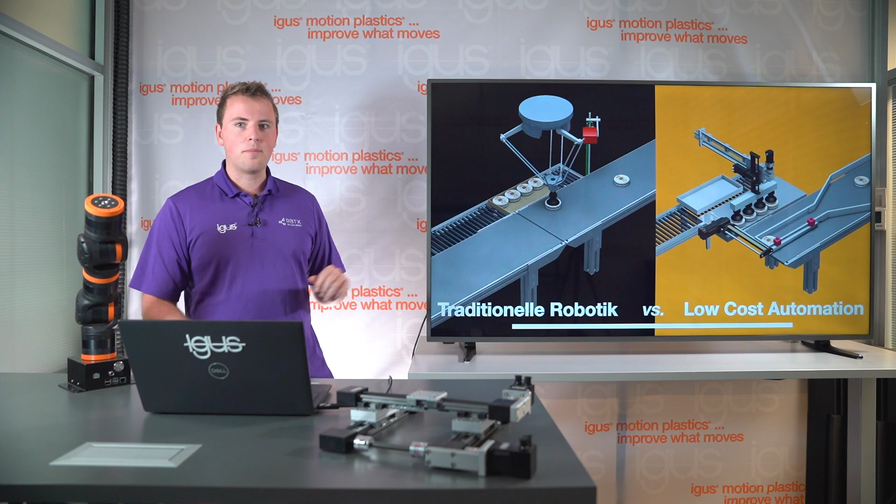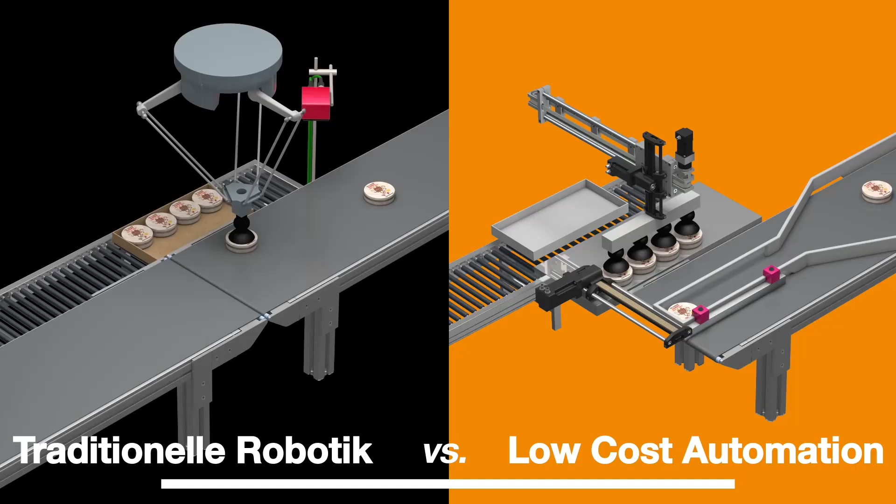So I want to start this webinar off by showing you a case study that we did a couple of years ago. Basically what we do is we compare traditional automation with low-cost automation. So I'll go ahead and play this video so that you can see basically the application here is a conveyor picking application. Something very standard that many automated factories have to deal with. On the left side, you can see a Delta robot with a camera system that is picking parts from the conveyor belt. And I'll run the video.

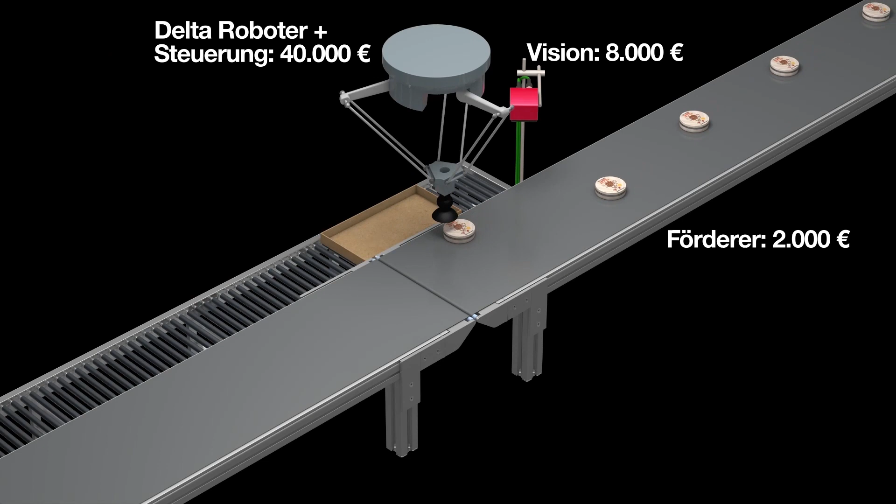Here you can see there's many parts per minute, so the picking has to be done quite fast. And then it's quite the complex process because the parts are distributed all over the conveyor. Now, the problem is not only the cost of the individual components, as you can see here, but there is an extra cost. It's the integration cost, making sure that the vision system works with the Delta robot.

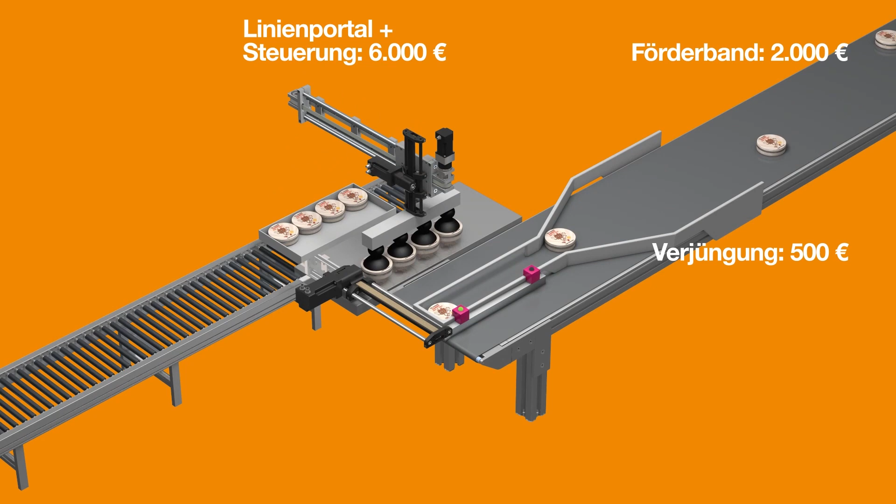In comparison, we have our low-cost option here that basically you can see there's a mechanical alignment system that makes sure that you don't need a camera system, but basically the objects are always in the same spot. You then have a linear pusher and another linear gripper that then take always 4 parts at a time. So as you can see, the cost around 10,000 euros is about a tenth of the price of the traditional robotic system.

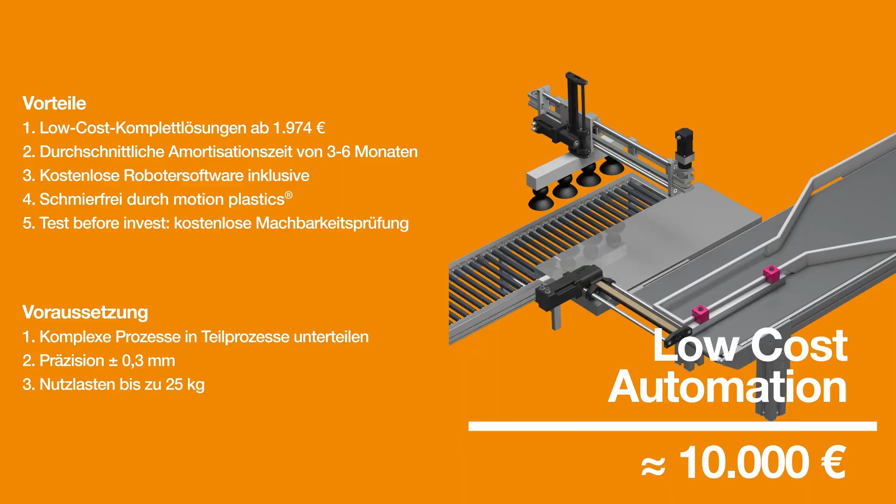One of the main things that you can see here is instead of using one robot, we actually use 2 robots. That's kind of counterintuitive because you might think that's more expensive. But in this case, we're able to lower the cost by using just very simple robots. So we'll talk a little bit more about it later. But one of the core principles of low-cost automation is breaking the process down into multiple steps, almost in as many steps as you can.

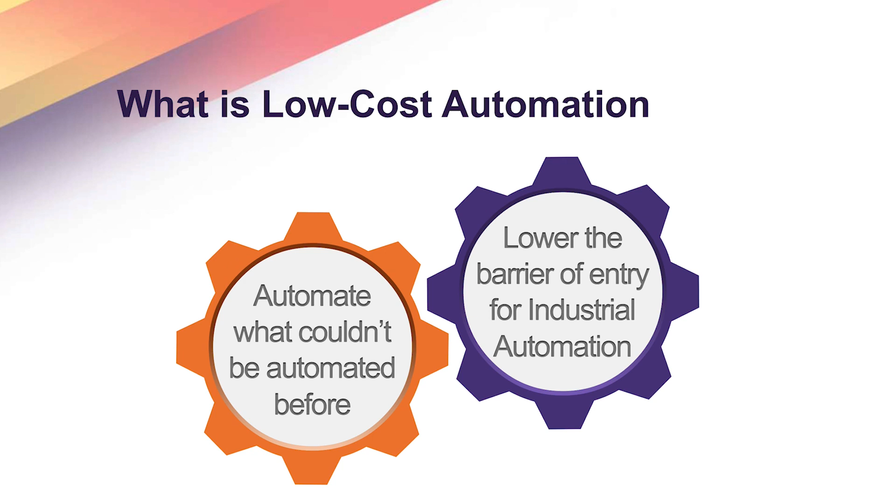But to summarize this, basically what low-cost automation is, is to automate what couldn't have been automated before and to lower the barrier of entry into industrial automation. That means that some processes in your factory just don't have the ROI, that you can just go out and get an RFQ from integrators so that you get an ROI on that project really fast, or never. You never know.

So basically what we found is that automation projects have two cost pillars. One side is the hardware side. Fast robots with heavy payloads and a lot of good precision, they cost a lot of money. Camera systems are very expensive, and then the grippers and the whole system together. That's one pillar, expensive hardware.

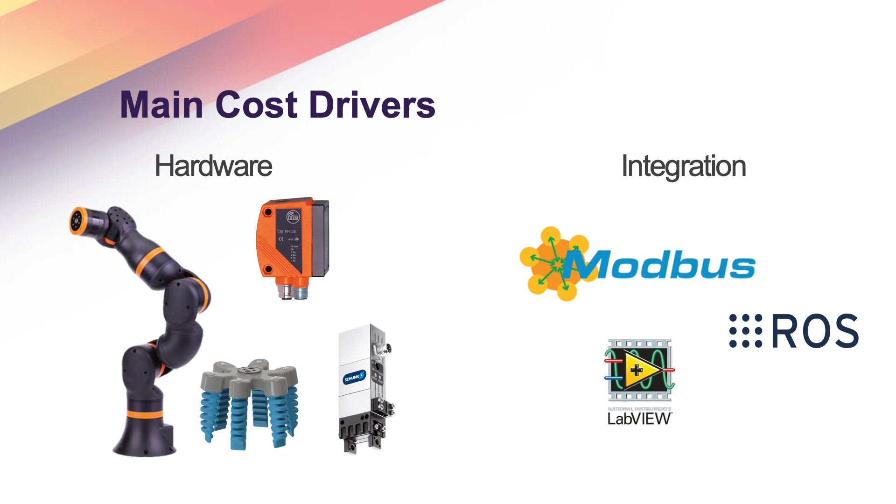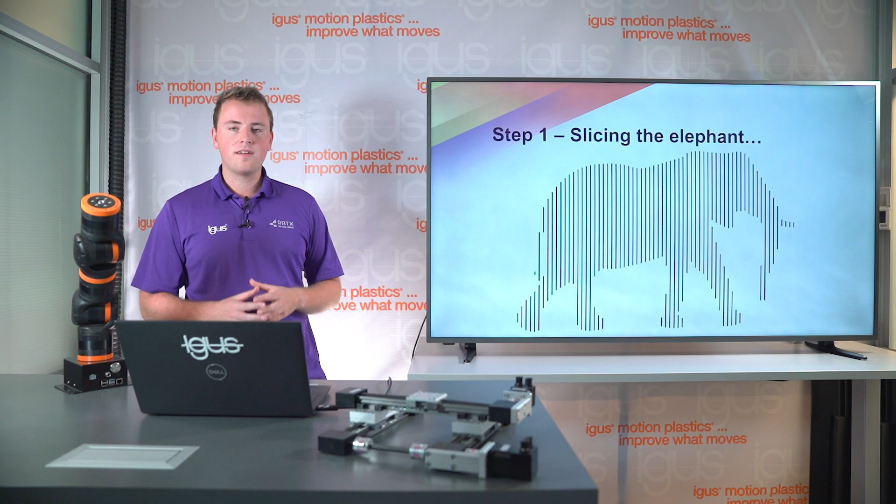The other pillar is the integration side. So using difficult-to-use software that needs a lot of expertise to plug the whole system together. That is usually outsourced because it's expensive to have a team like that in the beginning, but not having that means that it's even more expensive for those projects because you have to outsource it to someone else to do it for you. And then every single time something goes wrong or you have to change something, you have to pay those people again.

So the first step, as I said, for low-cost automation is to take a process and break it down into individual steps. As we just saw, there was a conveyor belt with parts coming down the conveyor belt. Instead of just picking the parts from the conveyor belt, we added a mechanical alignment system to make sure that the parts are always in the same spot. So that just eliminated a camera system, because the mechanical alignment system makes sure the components are always in the same place. You just have to detect that they're in the same place, and that is done by a simple proximity sensor.

You then have a pusher that moves those over onto a table to allow for more parts to come. So therefore you allow really high throughput. Then, instead of having a Delta robot that picks each individually, you just have a linear gantry that has maybe a higher payload, regardless, and then picks 4 at a time, which allows you to have 1/4 of the speed.

So you're not only making sure that everything is neat and fits in the box, but you're also reducing the speed and therefore the performance that's needed from the system. And this is what is really interesting about low-cost automation. Breaking the process down into individual steps where you need less performance allows you to use robots that are not the most high-performing robots when it comes to precision, speed, or payload.

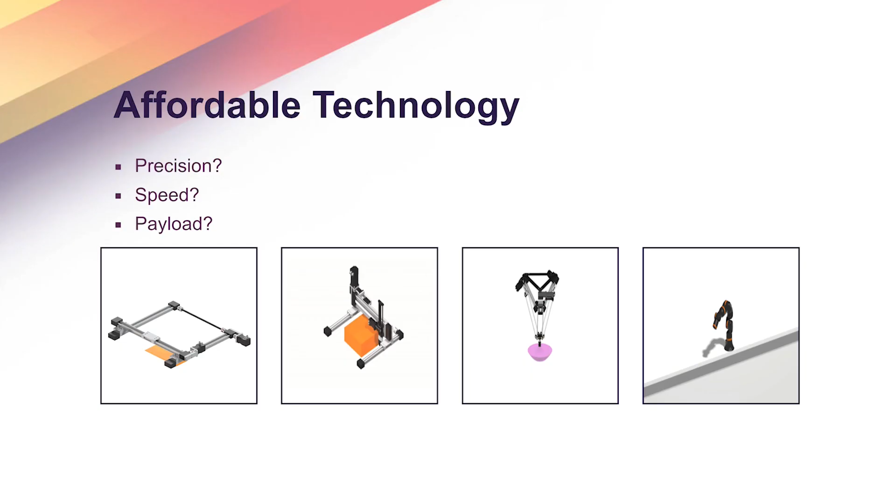Here you can see some examples of what we have. You can see our flat gantry. This is what I have here in front of me. We also have them as 3-axis systems, like the room gantry. The Delta robot, that is good for pick and place, as we've just seen. And the Rebel, the 6-axis collaborative robot arm. Those are just some examples of robots that we provide.

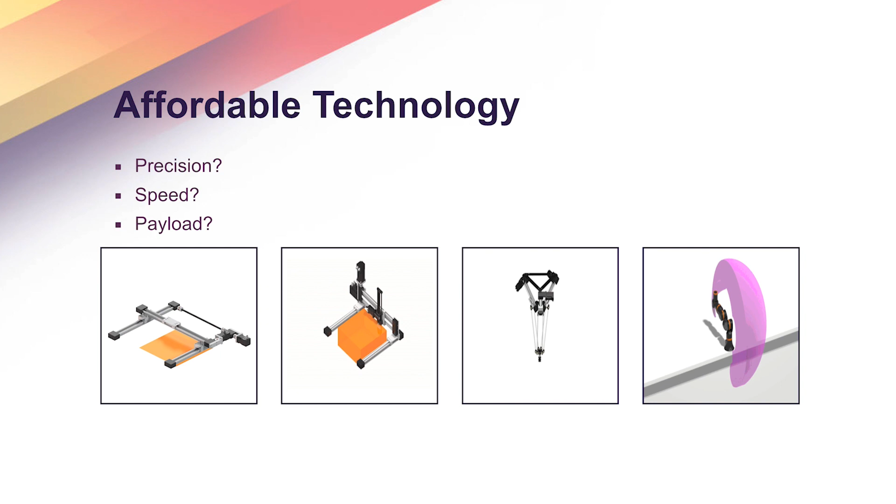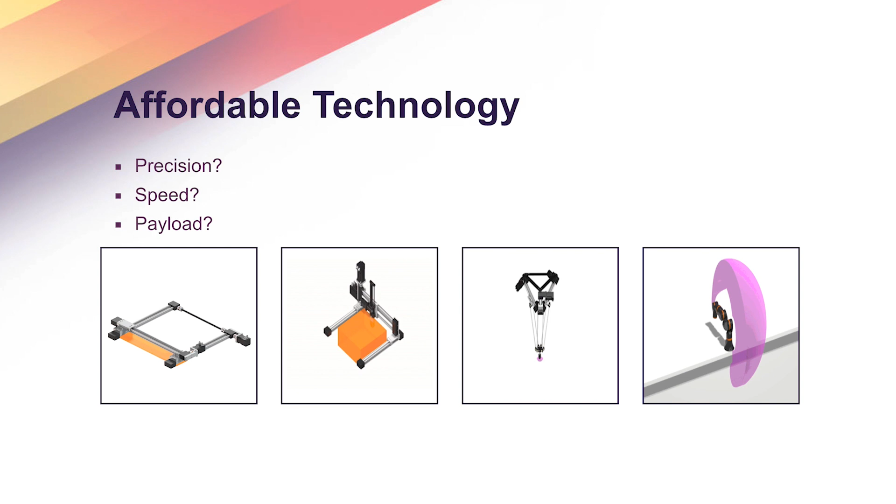And the idea of those robots is not to be the heaviest payload, the highest precision, or the fastest robots that are out there. The idea is really to figure out how can we make robots affordable, break a complicated process down into individual steps to make sure that these robots fit those specs. So you could also call it just-in-spec automation, and therefore allowing you to have a good ROI on your project.

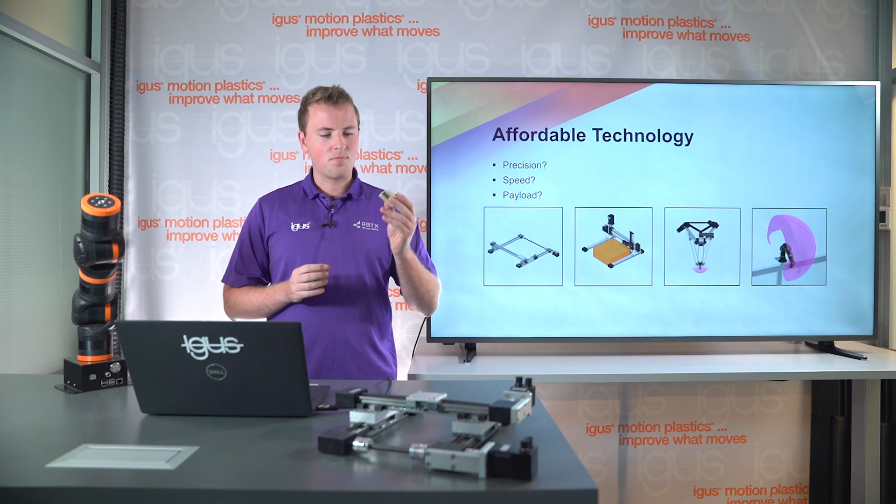There's many people out there, maybe you're one of them, that have a need for automation, but those processes are just too complex or too simple, or just parts are not expensive enough so that the ROI makes sense. Here I have an example out of our factory, which was one of the reasons that we started automating ourselves. This is a metal slider, and I'll hold it a little bit more into the camera, that has injection molded material around it. This is for our linear actuators.

This is our slide here. And basically the simple purpose of it is to slide in this actuator. So now we have it in the actuator. The simple purpose is to slide back and forth. This is one of our main products at igus, one of our core technologies, improve what moves with motion plastics. So what we have to do here is we have to injection mold the plastic around this metal slider.

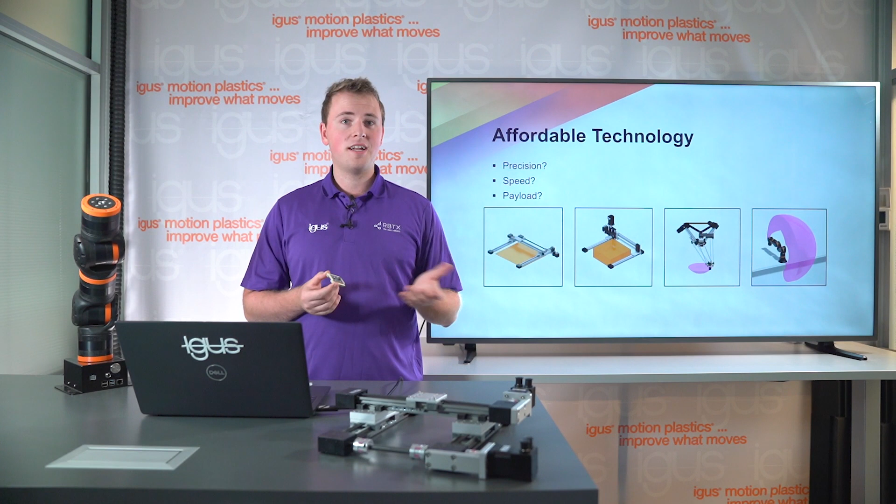The simple way to do this is to hire a person and have that person sit next to the injection molding machine and place these sliders into the injection molding machine. But you can imagine it comes with all the disadvantages that we see currently. We have labor shortages, this is a boring job, it's dangerous in an injection molding machine, and all kinds of other factors that might play a role. You might be able to do it faster with a robot, maybe you just can't find someone.

So next I want to show you a quick video of how we did automate this process, not the traditional way, but the low-cost way. And just so you know, this is a process that has been developed in Germany for our own use, and we have many machines running with it in our facility in Cologne. So before I start this, you can see here those metal sliders, they get fed in from one side and then go on this separator table.

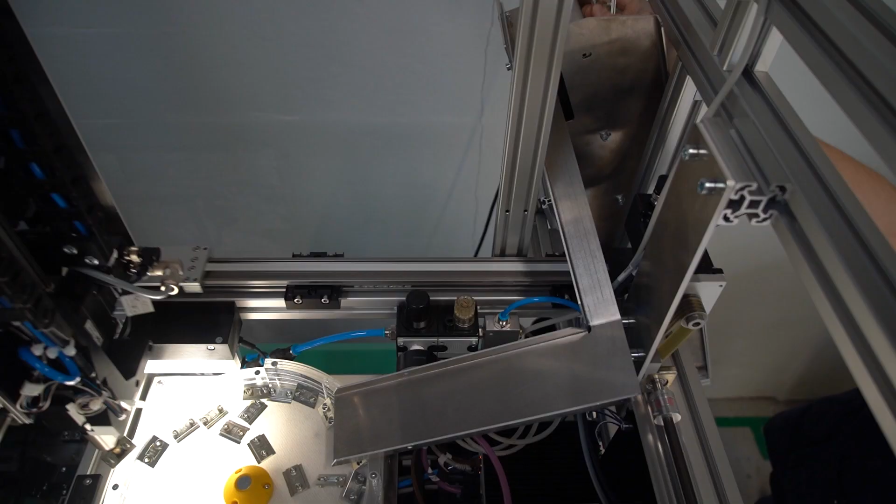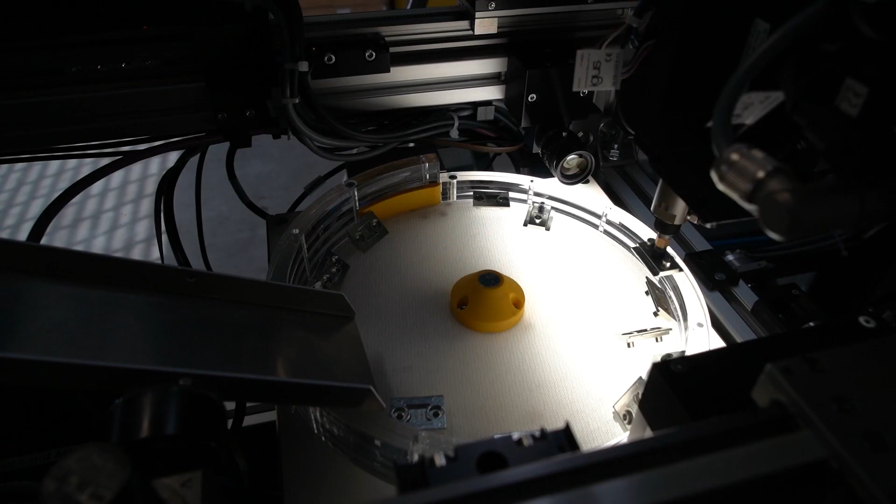Please imagine how many different single steps are in this automation process versus one robot arm picking it and putting it into the injection molding machine itself. So you can see the separator table shaking up these mini sliders, and then a camera system with the Delta robot detecting those sliders. We then can see another camera that kind of detects the orientation. Here you can see how the gantry robot puts the slider into the form, and this one is actually upside down, so we added a little flipping mechanism.

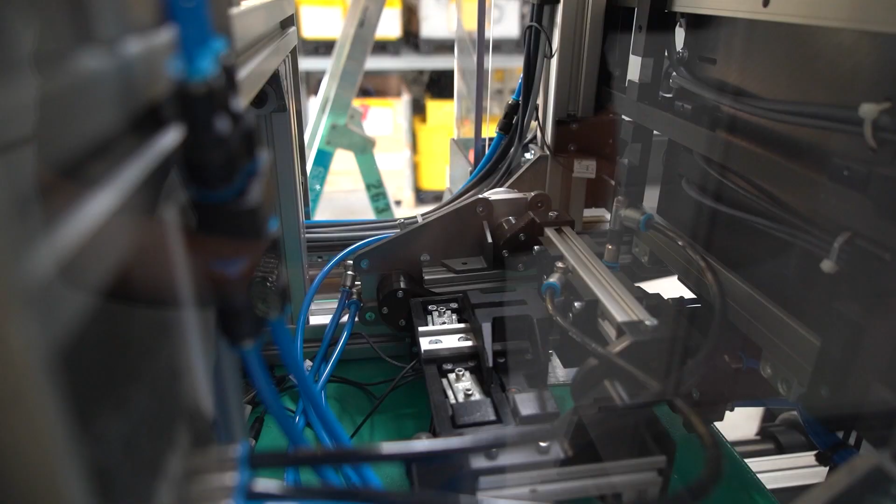Now 4 of these metal sliders get put into the form, get adjusted, as you can see here. Now we're waiting for one more to be added, and there it comes. We then adjust them and have basically 4 of these. They get rotated by 90 degrees because that's the orientation of the injection molding machine, and passed off to the next gantry. So we basically have 3 gantry systems that are nested inside of each other. And then they get placed in the injection molding machine.

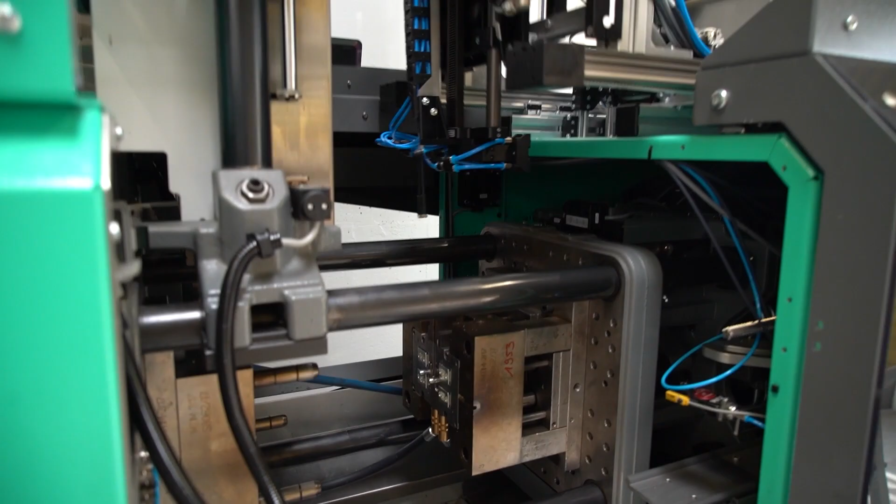What's interesting about this is that we got this fully automated system quoted by an integrator for $65,000, and we were able to, with our sales price, do this machine for about $25,000.

So we had a significant cost reduction, and this is also a very reliable machine, because linear systems tend to be very reliable and pain-free when it comes to maintenance. So this is just an example of how we break down a somewhat complex movement into individual steps with our own automation, because we also have our factories, and it's always great to use your own equipment.

But there are more parts here than you might see. There are camera systems involved, pneumatics involved, all kinds of systems involved to build a whole solution. And this is something that we've seen with most of our customers as well. You might come to us and say, hey, I think I might need a robot arm, and we might be talking to you about this Rebel or its bigger sibling, the normal Rebel.

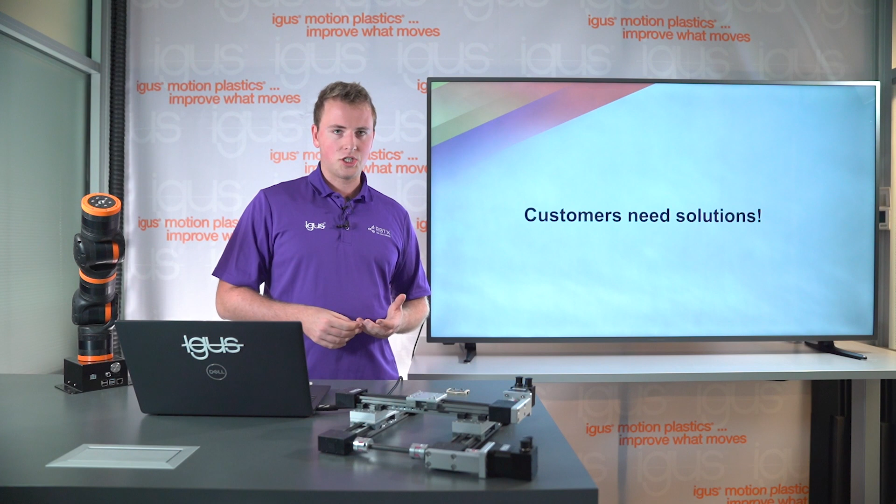But you might also still need a gripper, a camera system, a conveyor, you might need other things. So we realized that most customers actually need a solution. And this is where many problems came into play, because yes, your robot provider, your kinematics provider can do low cost, but then it's still really hard to find other companies that share that philosophy. Because there are so many automation companies out there, it's really hard to talk to 20 people at the same time if your automation project is very complex.

So what we did is we started a marketplace. We call it RBTX, Robotics Marketplace. We partner up with companies that have the same philosophy that we have: to offer low cost and easy automation. So to reduce the cost of the hardware, but then also to simplify the integration, so that maybe you can do it, or with the help of someone, you can do it fairly quickly and therefore affordably.

The idea is not to build an ecosystem that is fully enclosed. The idea is to have it semi-open source. And this is really important because automation is so vast, and I believe anyone in here probably has different use cases. Automation is so vast that you need to be able to account for other components as well. So we offer components from our partners and help provide all the documentation that is needed for that. We also have engineers on staff that help recommend the right parts and help you with the integration if you need more help.

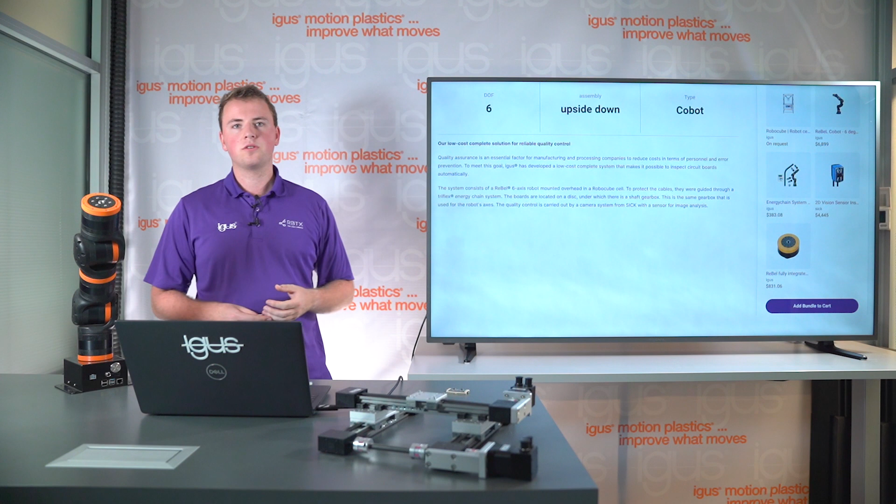On the right side, you see the components from the website that were used to complete the solution. You can see the pricing of the components, and if you try to understand what a 2D vision sensor for inspection is, then you can click on the component and learn more about it.

Speaking of components, the second part of RBTX, you can just browse components and see if they fit for you. Every component that is listed has its pricing transparent, so you can see it directly on the website. If you click on a component, you can see more information. You can find a description of the component. You can download the data sheet. You can go to the vendor and learn more about it. And on those component sites, you can also find the solutions where we've used this component. So it's full circle.